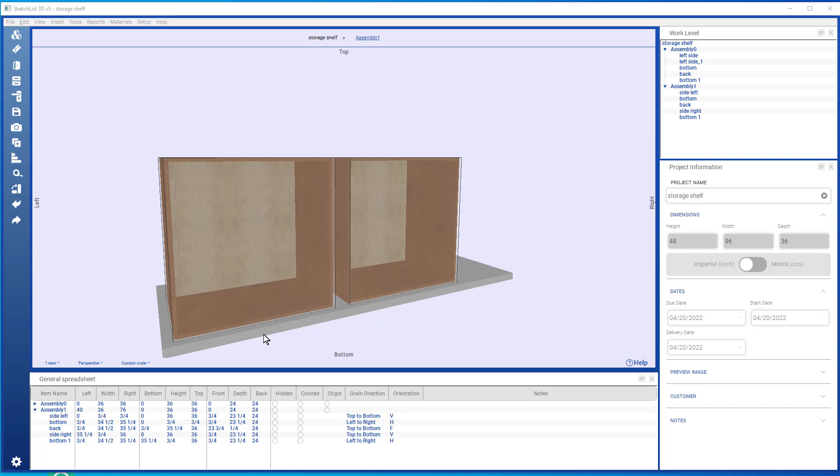Now that we have the assembly completed, we're going to add some additional detail. So I'm going to take that assembly and delete it with the delete key on my keyboard. When I cloned that, I should have renamed that, and I will, so it's top. Take this and move it a couple inches off of the bottom. Now, I've done that in the first video with the spreadsheet. Now I can do it with the calculator.

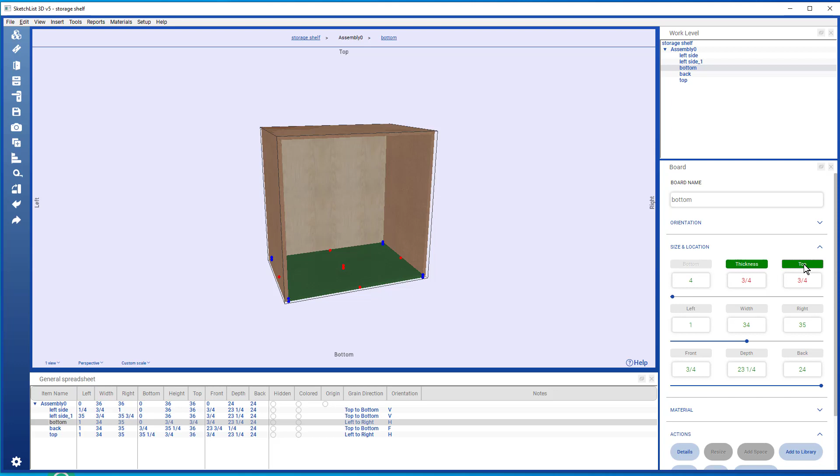So the distance from the bottom of the assembly to the bottom of that board is going to be 4, like that. I'm going to take this board and add some detail to it. What I'm going to do is shape the board to add the toe kick. So I go to board detail level, and I can get the board detail level by simply selecting the board and clicking the button detail. Or I can double click in the work level.

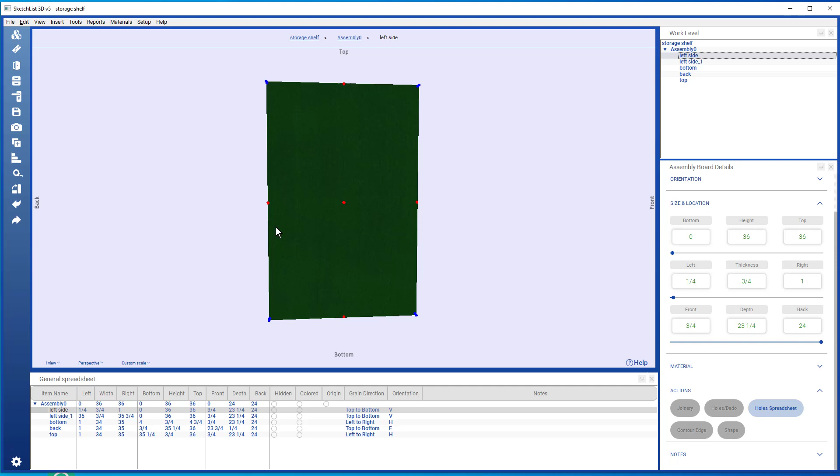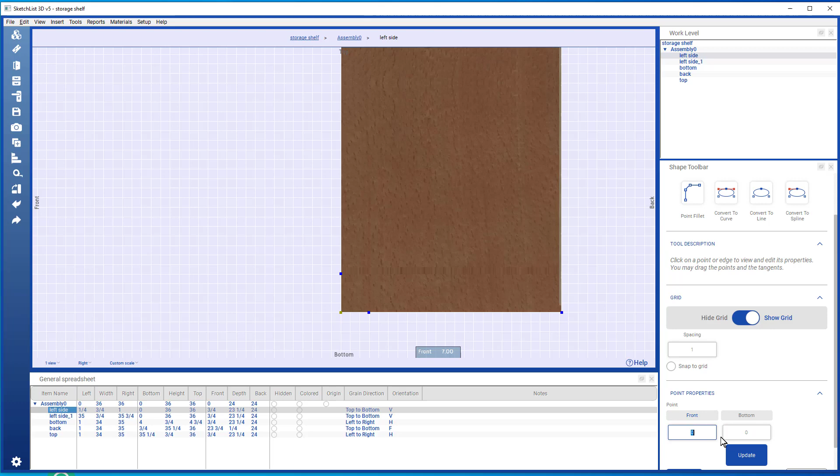When I'm in the board detail level, I'm going to select the surface and click shape, adding a point there and a point here, turning the add point tool off, selecting this point, and changing its values to 3 from the front and 4 from the bottom, like that. Select that point and change it to 3. Save, and there's my toe kick.

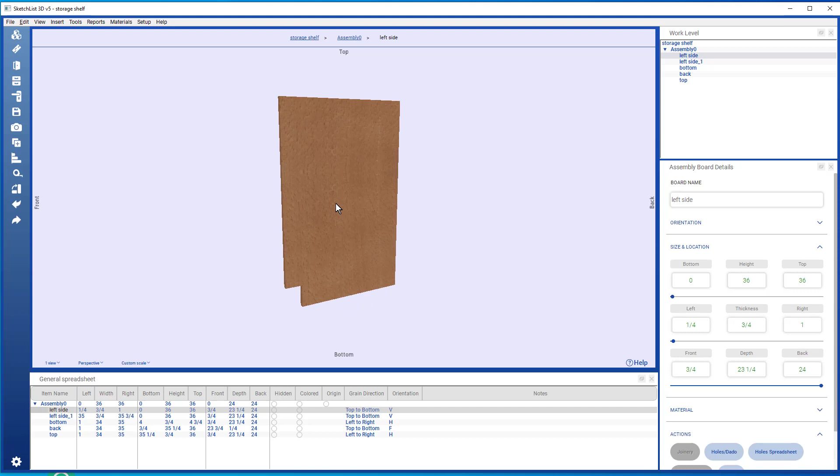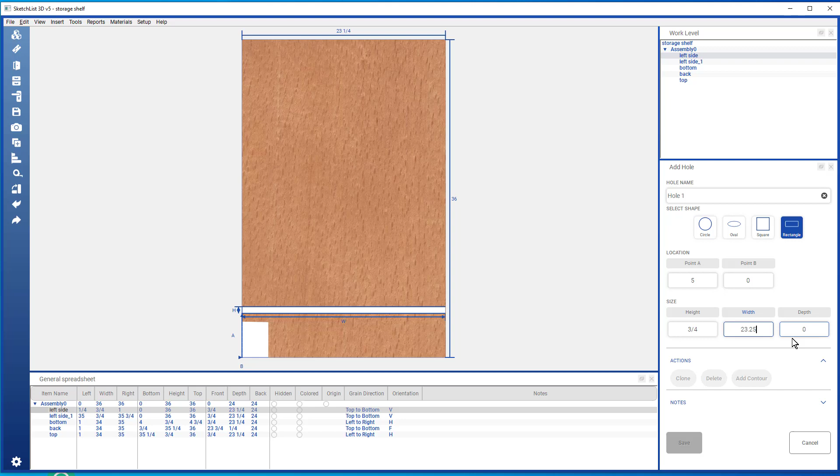Other details I can provide would be the dado on the bottom. So I select the edge, click holes dado. I'm going to start the dado 5 inches from the bottom, a height of 3/4, width of 23 1/4, and the depth of 0.25.

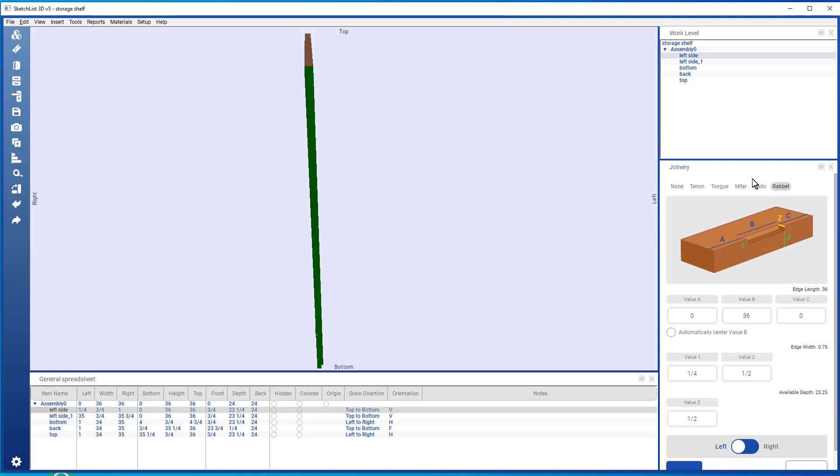Select the back of that board, click joinery. If I turn that back around, you see that the back is highlighted. Do a rabbet, and I'm going to accept the default values, but I'm going to change this setting so that the cut of the rabbet faces the right of the cabinet, like that.

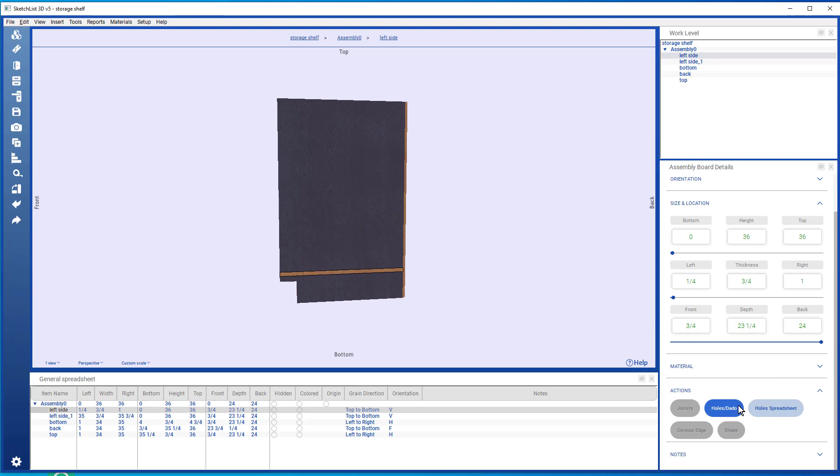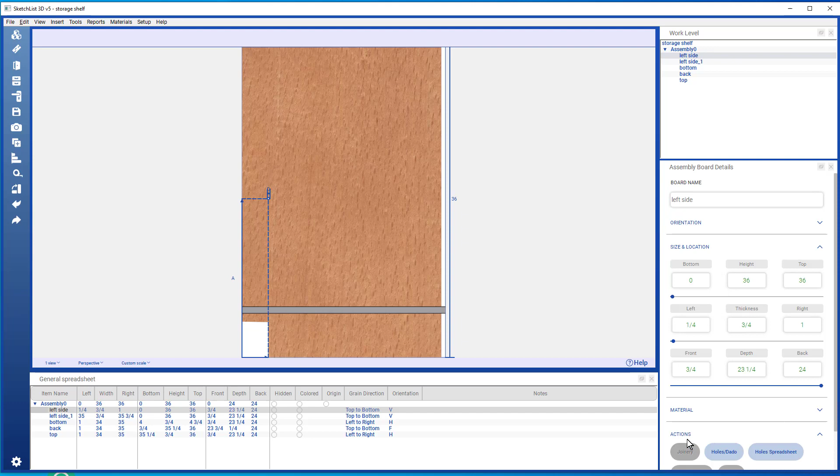And similarly, you could put more holes in, like for shelf pins. So this might be 18. This could be 3. The diameter would be 1/4 inch, and the depth would be 1/4 inch, for example. You see the hole there. Now you can go into the holes spreadsheet, take that hole, right click, clone and space.

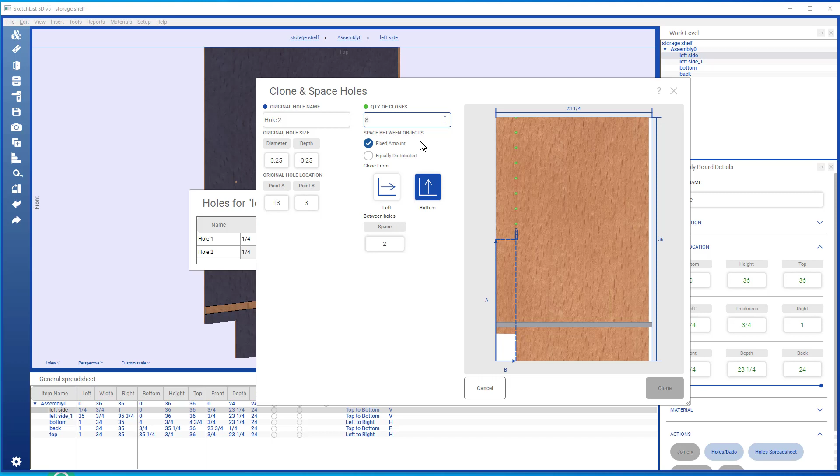You want to clone from the bottom, and we're going to add 8 holes, and they're going to be 2 inches apart. That might be a little bit too much. It's still a bit too high. I'm going to go with 7 holes, and there. Get out of this. And of course you would repeat that for the back set of pinholes.

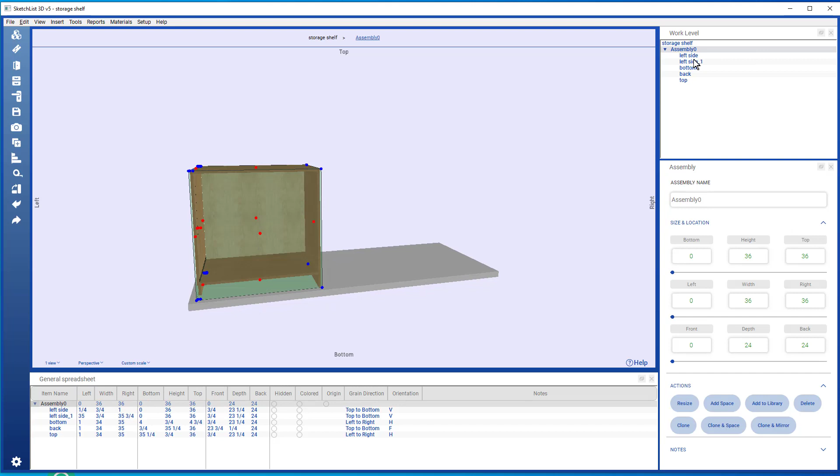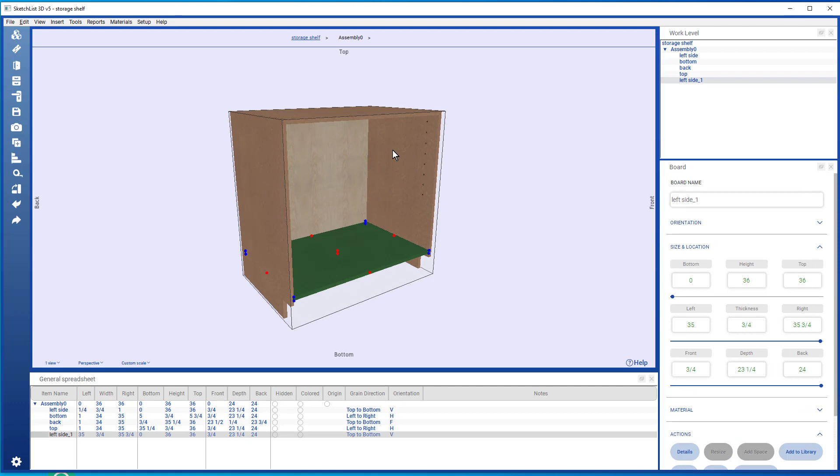Come back to the assembly level and actually go into that assembly level. I'm going to take that board, which is cloned, and delete it. Take this board and clone and mirror it. And you'll notice that the holes are on the proper side. So we have our cabinet, and put a face frame on by inserting a board.

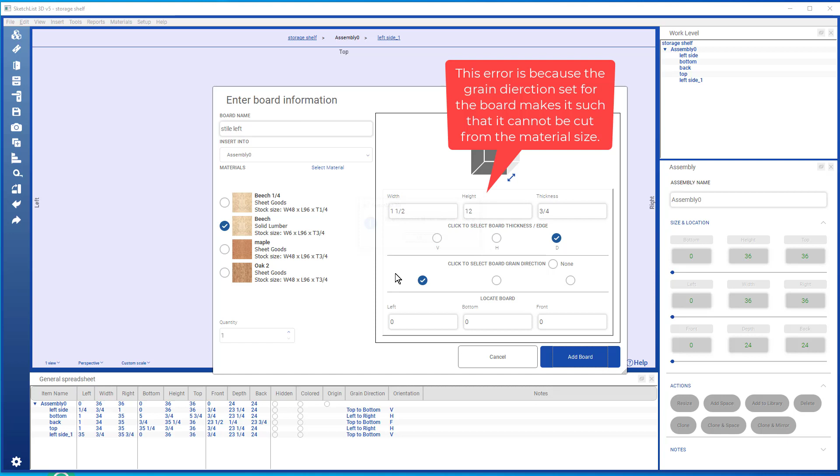This time I'm going to use the solid lumber, 3/4 of an inch. The width would be 1.5. Height, I don't care about too much at this point because I can easily resize it. And the depth will be 3/4. That 3/4 dimension is the thickness. The grain direction is running that way. I'm going to add it to the board. Select the height with the grain direction and add the board.

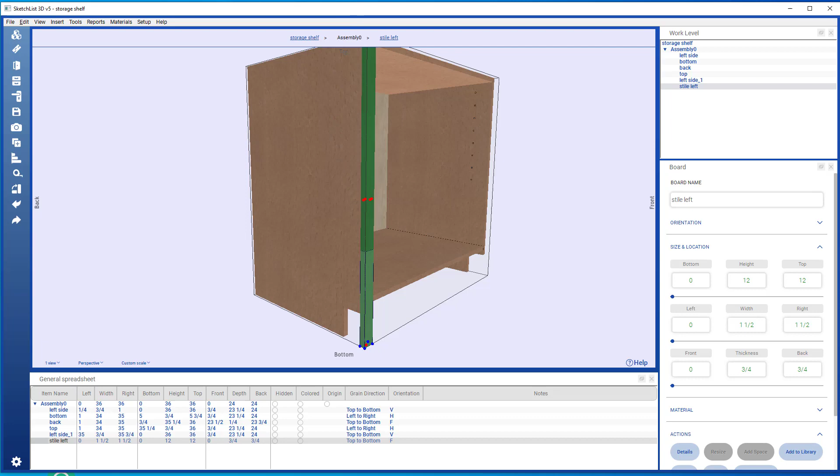Next thing to do is to locate that board properly in the assembly. I can do that if I just take the red dot and drag it up to the top, like that. And if I right-click that red dot, make its bottom 4, like that. While that's selected, I'm going to clone and mirror, and this creates the right stile, like that.

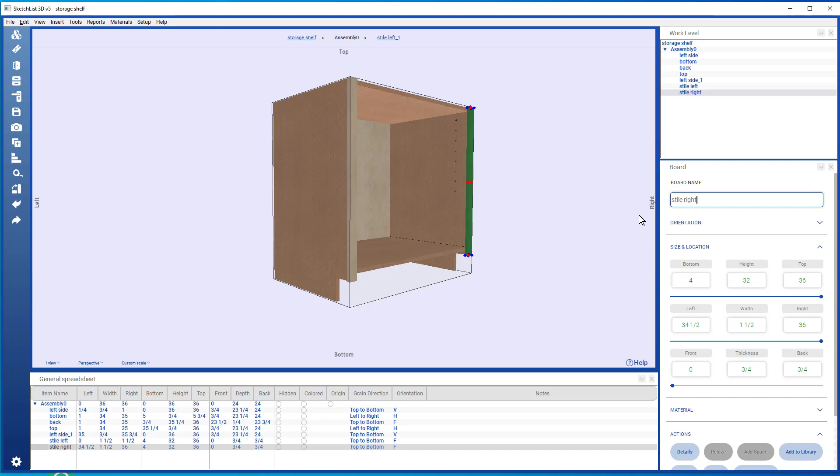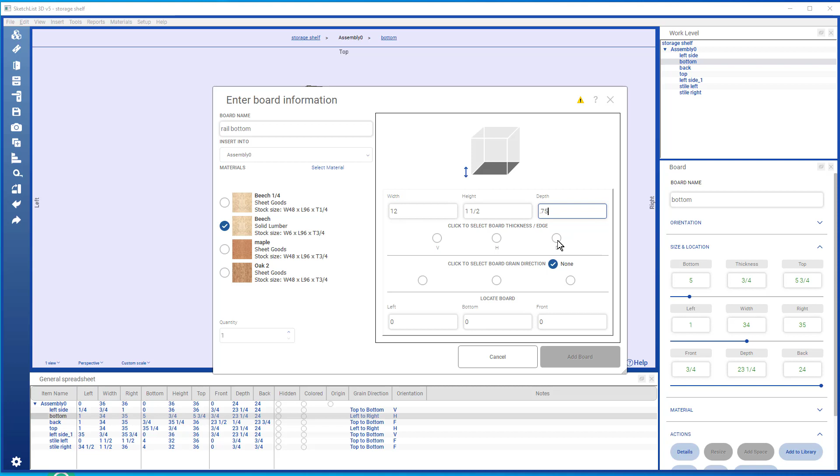The rails, take a quick check. Top of that is 5 3/4. Put in another board with the rail, using the same stock. The width, again, I don't care. Height will be 1.5. And the depth is 3/4. 3/4 is the thickness. The grain is going to run that way, and add the board.

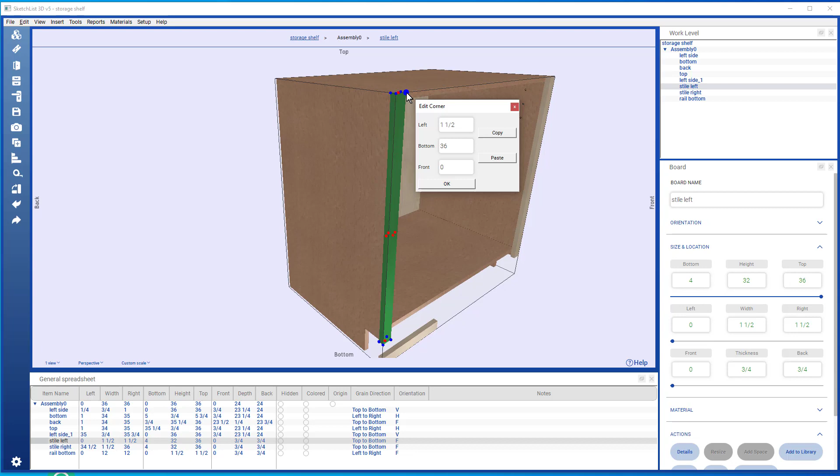Now I'm going to use a technique I showed in the first video, where I take the blue dot, get a good angle on that, take the blue dot from the stile, copy it, and then take the blue dot corresponding to the rail, paste it. Check your work.

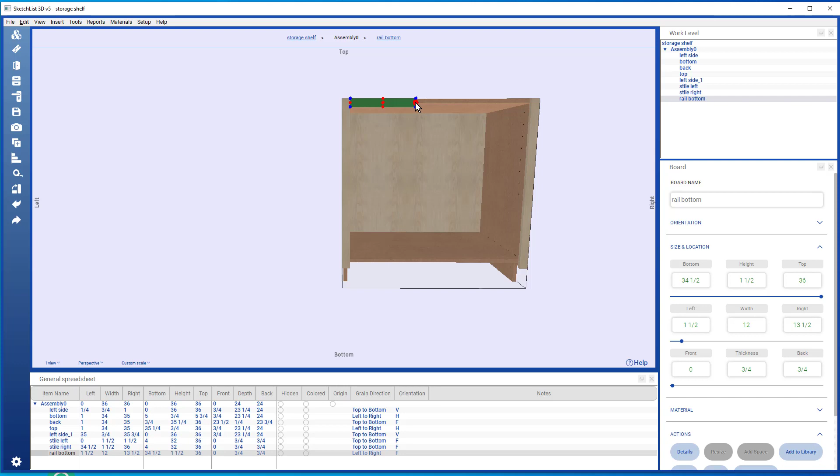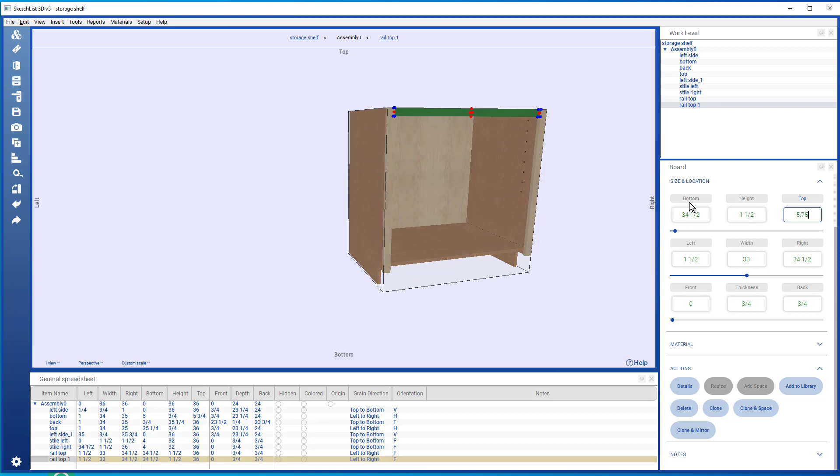I see the left value is 34.5, so I can make this right 34.5, like that. And while here, I'll just change that to top. Clone that, change its top value to 5 3/4, 5.75, like that. And now we have a little more detail in our cabinet.

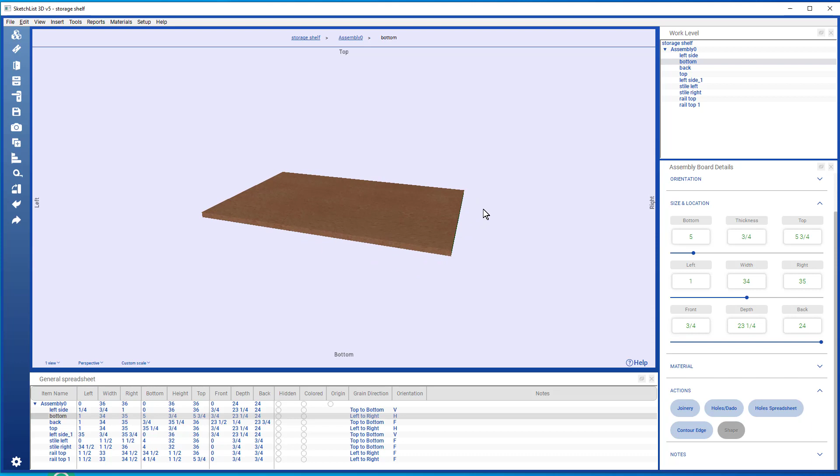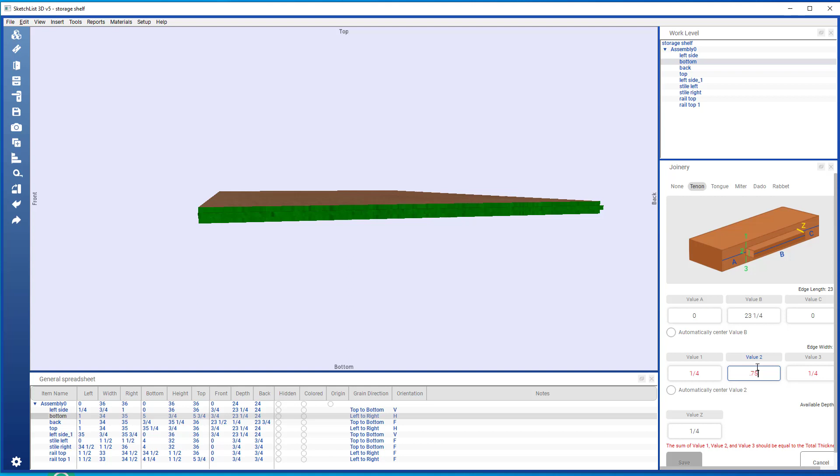One last thing to add is the joinery on the bottom shelf. So go to board detail level, take the edge, in this case the right edge, joinery. I'm going to put a tenon on. This tenon, I'm going to make the number 2 value equal to the thickness of the shelf, like this. So enter that, and I want to center that value.

The Z value is 1/4 inch, which is the depth of our dado cut, and save. And repeat that for the other side. Come back to the assembly level, and we're all set.